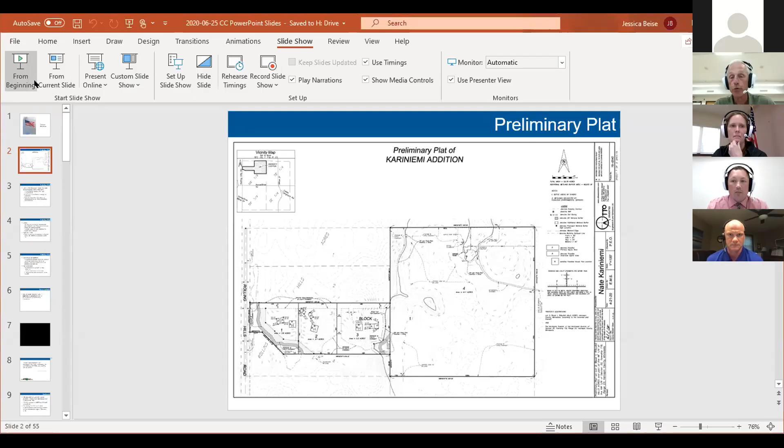Before we get started, I assume Kendra will have a presentation for us, but I want to speak to the building rights program. In general, the challenge is that the goal of the city in the building rights program was to allow people to consolidate building rights and thus preserve open space. I think Lisa brought up the point that they may be doing this with land that wouldn't otherwise be developable, taking advantage of that. Perhaps a valid point, and perhaps it should be looked at.

The issue tonight isn't what our program is. The issue is we have a program, it's in place, and we have to follow the rules and guidelines on that. If the council has an appetite for it, we can at a future date look at our building rights transfer program and see if we're missing some things that might be showing up here.

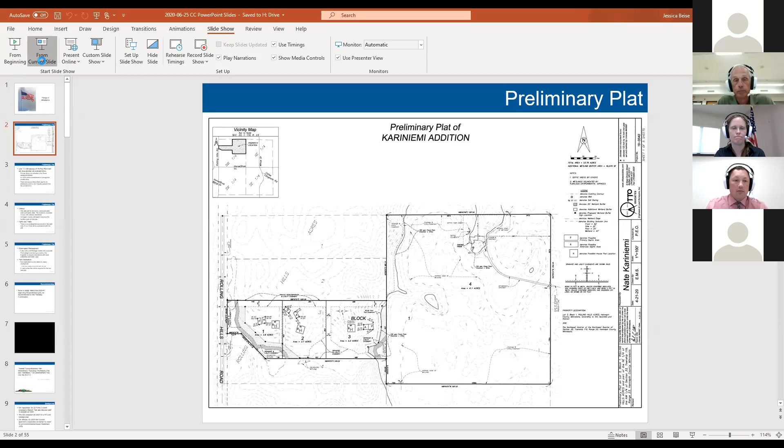That is not the beginning of my show, so I'm missing a number of slides. That is slide 6 of my PowerPoint. I don't know what happened to the other slides, but can I drive? Sure, unless you've got them hidden somewhere. I do not, Kendra, I'm not sure why they're not down there, but I'll make it work. I can pull up the email Kendra sent me earlier today. If there was an operator error, it would have been mine. Yeah, I'm just missing the aerial location map, which is kind of helpful, and the Planning Commission summary. You can just turn the screen over to Kendra, can't you? Yep, I should have just allowed you to be a presenter, Kendra.

All right. Thank you, Mr. Mayor, Council, sorry about the little snafu. You've already heard a little bit from the previous speakers.

This is a request to create 4 lots from 2 existing lots on property guided and zoned rural residential. This is Rolling Hills Road, and this is the lot that was carved off as part of Rolling Hills Acres — there was lot 1, lot 2, lot 3, lot 4 with the existing house. The Kariniemis' existing home is back here on this 40-acre piece.

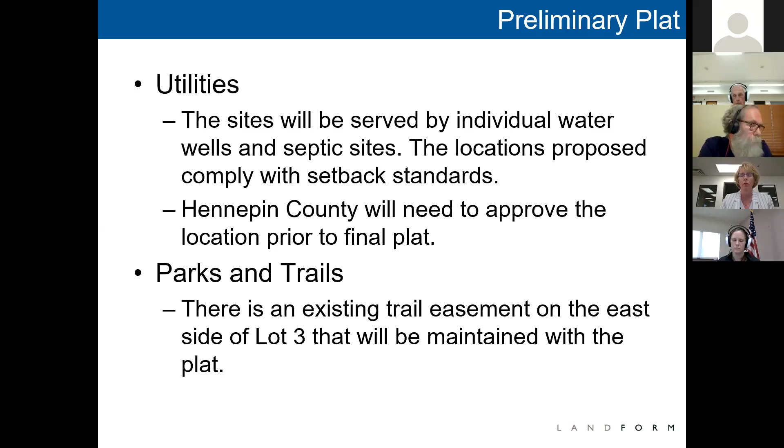There is an existing trail easement on the east side of the existing Lot 3 and the proposed Lot 3 that will be maintained with the plat. So it needs to be maintained even if Lot 4 eventually has future access.

Certainly stormwater management is a big deal with all plats, and it is true that there are still revisions that are required. The engineer's memo is in your packet with a number of conditions. Those final designs need to be approved by the city engineer. Again, before we'll proceed with final plat, they need to be able to show that those drainage issues have been addressed in compliance with city, state, and watershed rules.

There is, as I said, an existing trail, and park dedication will only be taken for the newly created lots. That's 2 lots that will need to pay park dedication. So with that, we recommend that you move to adopt Resolution 20-47, approving the preliminary plat as recommended by the Planning Commission.

Kendra, can I ask a question about the previous screen, please? Or Ron, may I ask Kendra? Yep, okay. Could you define a dry pond and drainage swale, please? Would I defer that to the Public Works Director? Is he here? I think he is. I don't want to misspeak because it is important. Is Kevin here tonight, Brad? Yes, I'm here.

So a dry pond is basically, the term dry means it doesn't always hold water. It's a low, basin area that would fill up with water during a rain event and then dry down. That dry pond is part of the stormwater plan, and whether this is a dry pond or a NURP pond which would actually have water in it, that hasn't been fully approved. That's what they initially submitted. The dry pond would visually look like a grassy bowl that fills with water and then drains down. A swale is really a ditch that has grade on it. It can take any form and side slope, but it's basically an area where you convey stormwater.

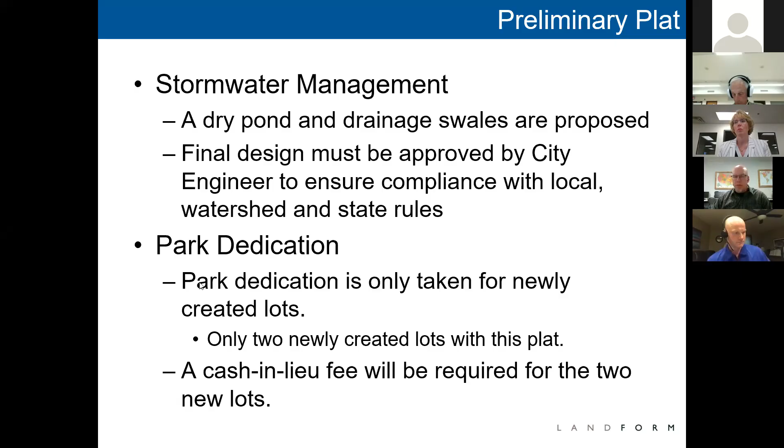From what I looked at and from the discussion at the planning commission, there was some discussion about adding another property on the 40 acres, but that comes with its unique challenges on the northwest section of that lot. My point in asking is, if this lot has 5 property rights and we deny it simply because we don't like the way it looks, we're taking something we've offered to the whole community in our current ordinance standards and saying you can't do it just because we don't like it. That's not a basis for those decisions. This is a reasonable use, and whether it's good, bad, or otherwise in my opinion really isn't all that relevant.

Yeah, Brian, I agree with you. I think that's exactly what we're dealing with tonight: what are our standards right now, and is this meeting those standards? Based on that, we have to treat it accordingly. The issue of whether the 40-acre parcel could accommodate the 4 building rights it has is maybe pertinent to a future discussion on building rights, but it's irrelevant for tonight's discussion.

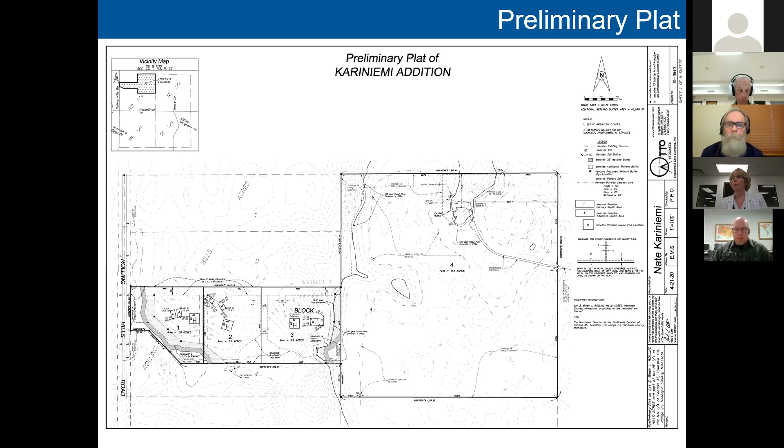I would also add, for those on the call with concerns, I'm only comfortable moving forward with this because of the conditional elements on it. The 17 items brought up and laid forth before this final plat can be presented mean the final plat can't go forward if the drainage issues aren't resolved and if the other listed issues aren't resolved. If that wasn't the case, I wouldn't be comfortable with it. There are significant concerns that have to be addressed, and I think staff and those addressing this, such as the watershed, will be looking at those things.

I don't want to dismiss any of the comments made. I think those are relevant, but we can't turn this down simply because we don't like it, especially since these other issues will be decided based on how they come out. We're not giving final approval here. There are conditions on this preliminary approval and the conditions have to be met. The neighboring properties are right to express their concerns about drainage issues; they should stay on top of it and get as involved as they want. Hopefully staff and our support will look at these issues and make sure they're covered, and I have full confidence that's the case.

Go ahead, Alan. I was just going to echo Brian's comments. I don't like this at all, but we're really bound by the ordinance, the same ordinance that allowed the 40 acres to be split originally into the parcels in question. It's one of those things where sometimes you have to do what you don't want to do because that's the way the ordinance is. We can't foresee every situation, and if we could have foreseen this, we probably would have written something into the ordinance before.

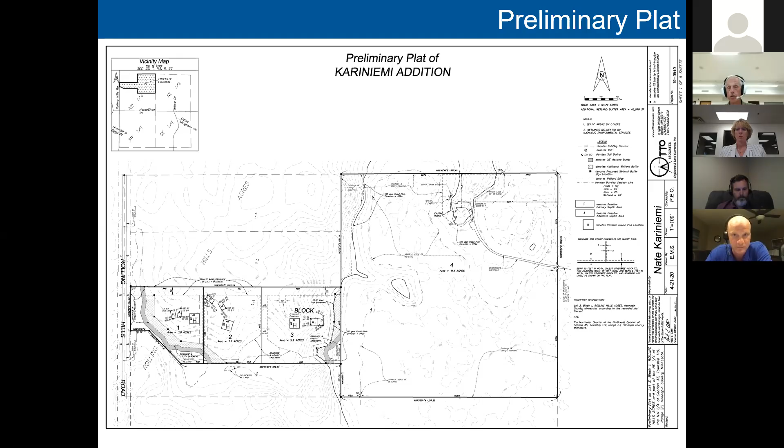Okay, any other questions, comments? Hearing none, I'll entertain a motion to approve resolution 2020-47, which is a preliminary plat with the conditions as stated.

So moved, Dejewski. Do we have a second? I'll second it. Okay, any further discussion?

Yeah, I'd like to make a friendly motion to amend his motion. With regards to the engineering memo, when it talks about drainage, it talks about... maybe I misread that. I think it was talking about a drainage basin that may require additional. I guess never mind, I'll withdraw my friendly motion.

Okay, any further discussion? All in favor of the motion signify by saying aye. Thomas, aye. Anderson, aye. Dejewski, aye. Bodema, aye. And Schultz, aye.

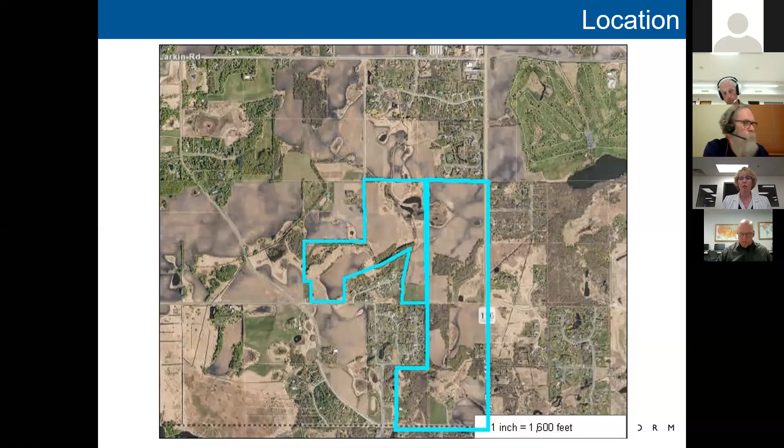Next slide. I put the school districts in, I forgot that I guess. This is in both the Wayzata School District on the east primarily, except for the Tice property, which joins the Dempsey property on the west in the Rockford School District.

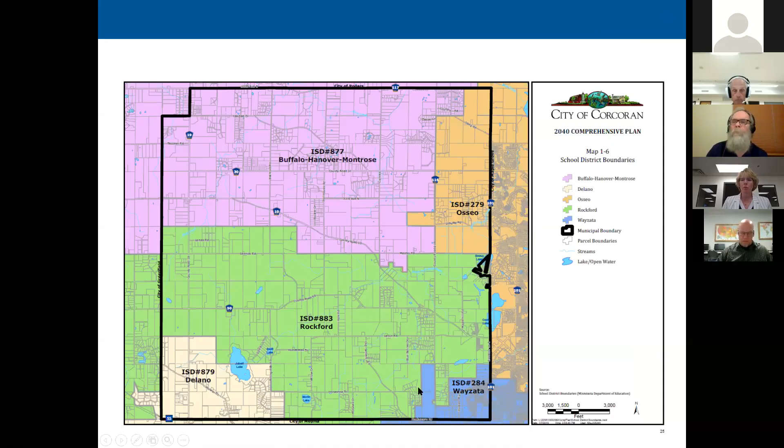Next slide. The property is guided low density residential, which is planned for 3 to 5 units per net acre. And it's zoned urban reserve, which is a holding zone until development is proposed.

I think on that slide, I was just outlining the applications that are involved. A comprehensive plan amendment will bring the Dempsey property into the initial sanitary sewer phase, which will allow us to bring the sewer down from Ravina and loop it up to the north, ultimately to extend with a loop to the downtown project. And then rezoning the property from urban reserve to planned unit development, and then the preliminary plat and PUD development plan.

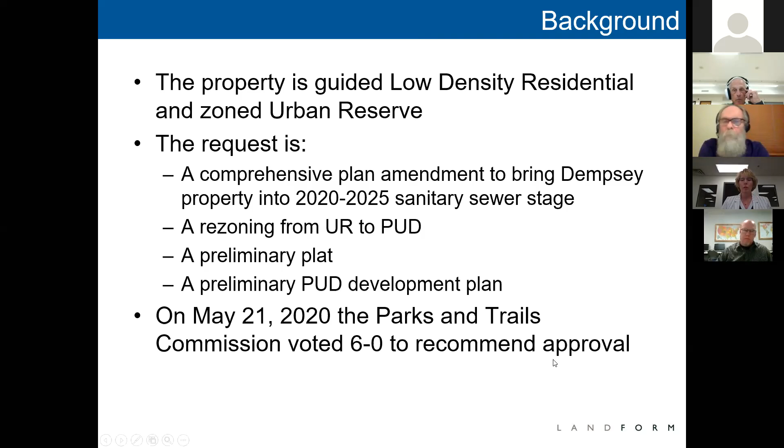On May 21st, the Parks and Trails Commission reviewed the parks component of the project and voted 6-0 to recommend approval of that with the changes as recommended by staff. No, thanks Jess, that was the right slide.

And then Planning Commission reviewed this on June 4th. In addition to the applicant, there were 3 people who spoke at the public hearing on this item. The city also received an email and a letter that were included in the Planning Commission packet and in your packet for this evening.

There was a very robust discussion at the Planning Commission, and at the end, the Planning Commission voted 3-2 to recommend approval of all of the items with 3 changes to the PUD resolution: to require cul-de-sac islands on all of the cul-de-sacs, 2 are currently shown. Require a permanent conservation easement over the tree preservation areas, and then identified a couple of different areas in addition to the lots that staff had previously identified as conditions to add additional landscaping. Those conditions are reflected in the draft PUD resolution in front of you tonight.

Next slide. It was, as Councilmember Schultz knows too well, and others may know now after watching it, it was a late night. Late into the evening, Lennar did speak about some issues that they requested modifications to. The Planning Commission did not make any changes.

I wanted to highlight some of these issues because I know Lennar would like to speak to them tonight, and at least give you some time to identify them.

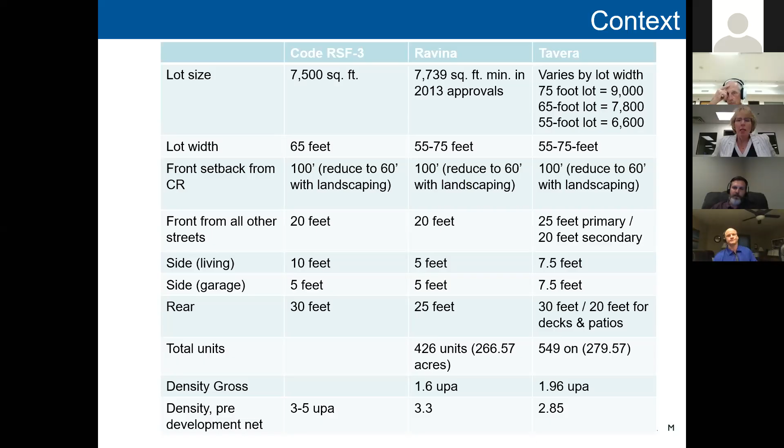Next slide. Kendra, can I ask you a question on the comparisons? Did you have comparisons of the garage size versus the front of the house? I looked back at the original Ravina, and to be honest, on the original Ravina they said here's our product types, none of them comply with the 55%, so we'd like the flexibility, and here's what we'll give you in return. So we really didn't measure at that time back in 2013, I did not have a comparison.

Did we do any changes throughout the PUD amendments through Ravina related to the garage space exceeding 55%? Yeah.

I would imagine we did when we went to some of those smaller homes. Yeah, the one thing we did do that I can recall, and I believe this is the only change related to that, when Lennar came in with the Ravina development, their proposal in exchange for more garage space was that we will not have any garage-forward homes in this project, plus they'll jazz up the front of the garage. And the council approved that.

And then, I don't remember how far into it we were, maybe '17, they came with a new product they call their Discovery Unit, which is a smaller home with a 2-car garage generally, and it is garage-forward. That actually may comply with the 55%, I can't really remember. But the council did approve an amendment to allow garage-forward on the Discovery units in that project.

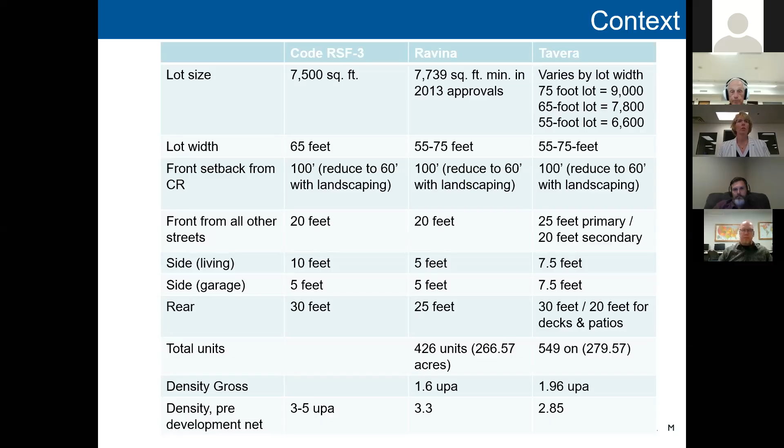It's a change to the sewer staging plan to allow the entire property to be developed together, which benefits regionally by allowing that sewer extension to be part of the project. So, next slide.

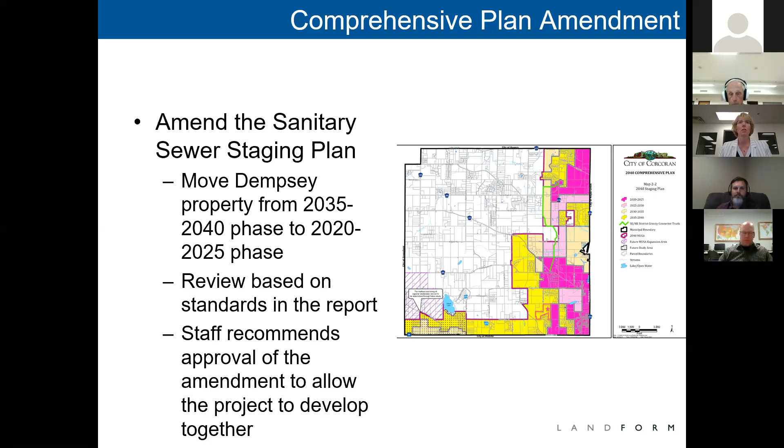The rezoning from urban reserve to planned unit development. As you know, urban reserve is a holding zone until sewer and water is developed, and then at that time we would rezone it to a zoning district consistent with that underlying land use. There are a couple different districts that would typically fit.

RSF3 is one of them, and that's why we used that for the baseline measure for the PUD standards. Now, a PUD is really contract zoning.

And this is more for the audience than for the council—you know this. It's contract zoning, a negotiated zoning district where the developer asks for some flexibility, and in return the city gets other things we wouldn't be able to get with a straight plat.

With the previous application, if it meets the code on a plat, you have to approve it. Well, this gives us the ability to negotiate better design or other amenities. So, next slide.

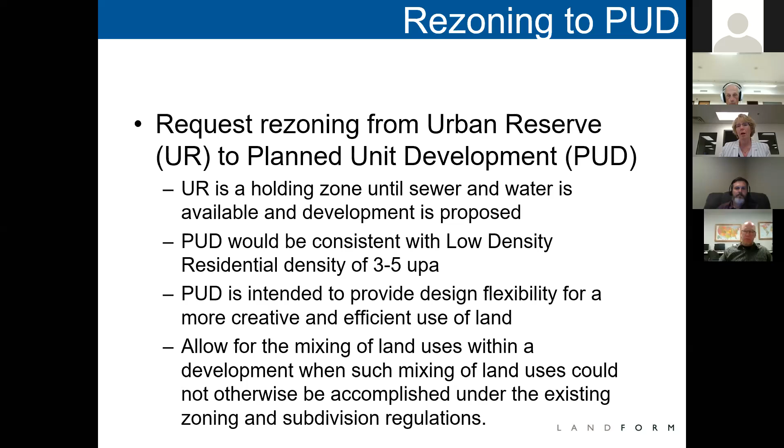Again, there are PUD standards in the ordinance, and I just want to highlight the rezoning to PUD doesn't become effective until the PUD final plan is approved. So at a later date, you would approve the rezoning tonight, but if you read the resolution, it's effective upon...

Adoption of the PUD final plan. Just a procedural item, but I wanted to highlight it. Next slide.

This is the PUD plan. We kind of looked at it earlier, but again, in context, you've got townhomes down in the southeast corner of the site, primarily single family as you wind through the site. At the end of Trail Lane, you've got a small twin home development, and then a twin home development behind that, north of Trail Lane, and then up by where Blue Bonnet connects.

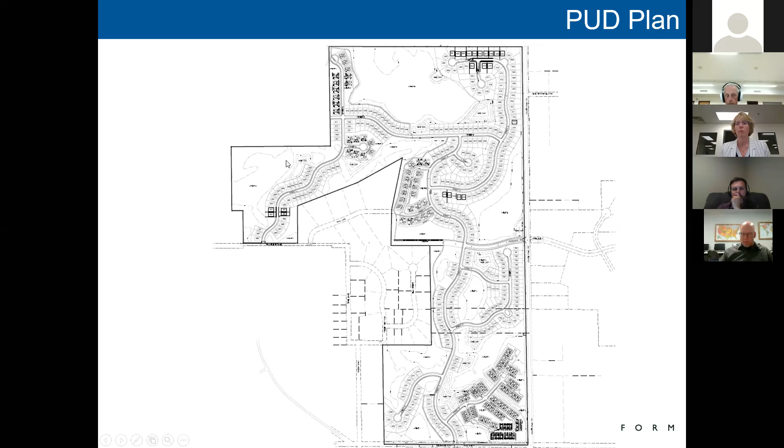So the PUD request in general, I've summarized here. I'm not going to go through it because I know you guys have done your homework, but this is sort of the proposed flexibility and the proposed benefits. Next slide.

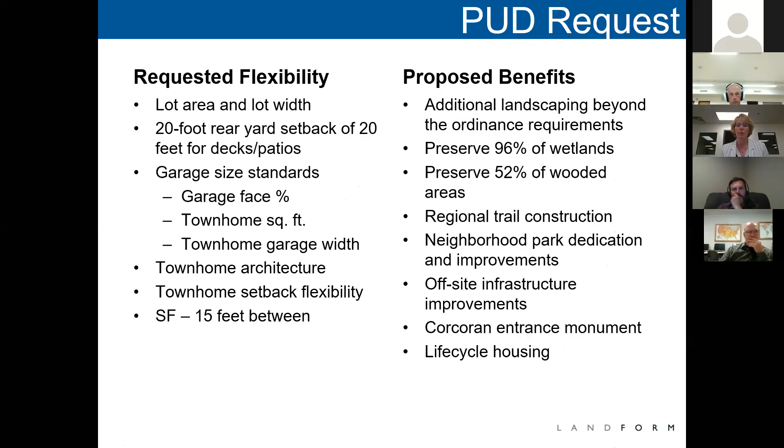So the plan includes 265 single-family homes on a mix of 55, 65, and 75-foot lots, and then 70 villas, which are single-family homes with association maintenance on a mix of 55 and 65-foot lots. There are 80 twin home units, meaning 40 buildings, 80 units, and 134 townhomes. Next slide.

This table was in your staff report, so I'm not going to read through it, but it highlights some of the areas where flexibility is requested for certain units. I did not highlight, just for the record, the 7.5-foot side yard setback, because really what we have in the code is a 10-foot side yard setback on the living side, 5 foot on the garage side, a total of 15 feet between buildings.

And I think it gets us there. So we could talk about that, but to my mind, it was a 15-foot separation. So I didn't highlight that. Next slide.

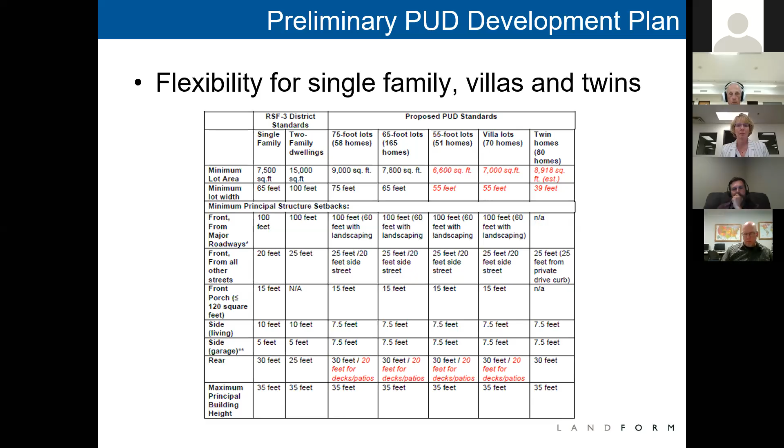Flexibility for townhomes. Single-family homes have a 20-foot front yard setback. Townhomes have a 25-foot front yard setback. And we recommend that that be maintained. And front yard under our ordinance is along any street, it's a front yard.

In fact, we recommend that they maintain that 25-foot setback along the perimeter of the site as well, which may occasionally be a side yard. We think that it's important to maintain that along the perimeter of the Tavera site.

At the Planning Commission, there was some confusion about base lots and unit lots. It is a technical piece that came up, and I put it in here, but a base lot, you could have a townhome base lot, which wraps around an 8-unit townhome building, and each of those units in the townhome has a unit lot.

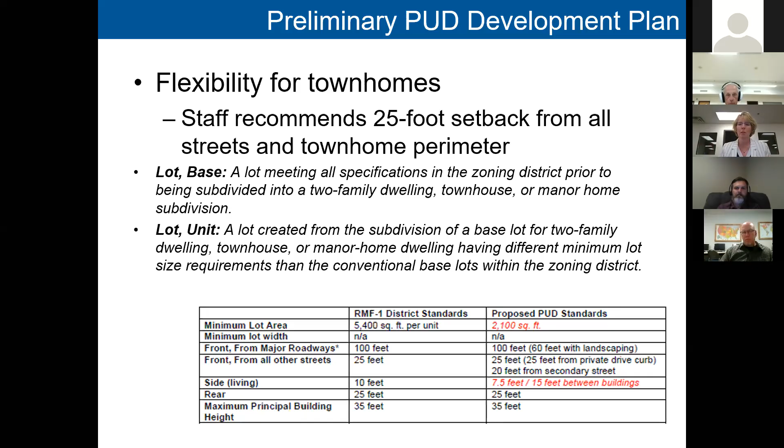And really, because the unit lot just mostly goes around the edge of the actual structure with a common wall, when we look at lot sizes, we're really talking about base lots. And there was some confusion about that we probably needed to clarify. So next slide.

Design standards, flexibility for the single family, villa and twin homes. Again, they are requesting flexibility to allow more than 55% of the front face of the building to be garage. And depending on the unit type and whether it's a 2, 3, or 4 stall garage, that could be as large as 75% of the building face. And this was a big item at the July 2019 work session.

And consensus at the time, not complete agreement, but consensus was that it was really important to maintain the building separation, and that garage face was important, but there would be consideration given for flexibility with the PUD if there was higher quality architecture without garage forward design.

Because of that, in this case, the applicant is not proposing to prohibit garage forward design, but the staff report suggests, and the Planning Commission recommended, that in order to allow that additional face of garage, it would have to be not garage forward.

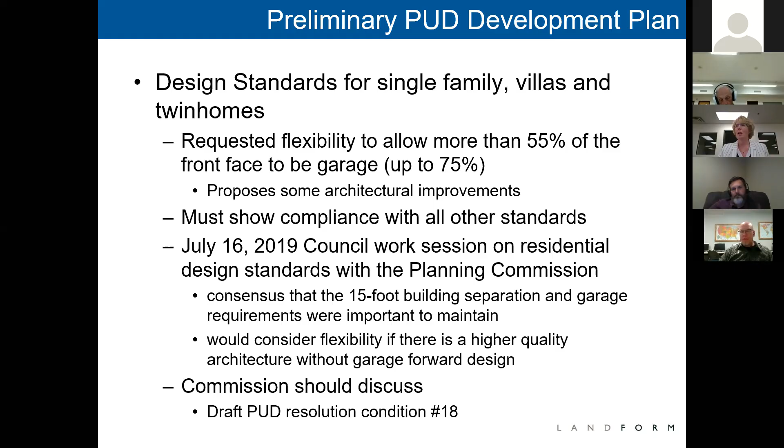So these are some examples of the single family architecture. Again, it looks very similar, I think, to a lot of the product in Ravinia. But as we said back in 2013 with Ravinia, it's important to note that the market changes all the time. These are some examples of products they're building now, but they will have slightly different products as this moves through its 8-year phasing plan.

So we're not approving specific single family home products, but this is an example of the kinds of products that they would do, and they would still be subject to all of the standards in section 1040 of the ordinance, which relate to materials used and percentages and architectural elements. And generally these do appear to comply with that. We don't have the percentages, but they generally do, with the exception of the garage percentage in some of these cases.

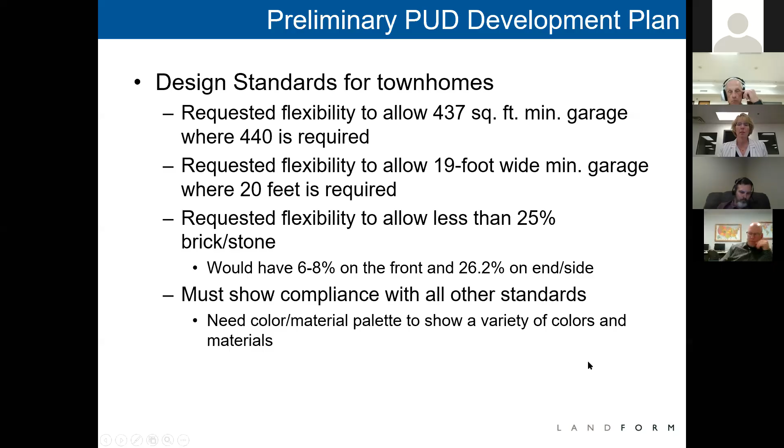These are examples of townhomes, and I believe in the applicant's narrative he mentioned these are similar to the product in Maple Grove on our border across from Lions Park, if any of you had a chance to visit them. So pretty typical townhome, a mix of some wainscoting on the front of stone, and then a mix of lap, shake, and board and batten trims above.

Next slide. Utilities will be extended from Ravinia to the site at the developer's cost, and the city has been working on that extension of Gleason Parkway and the associated utilities extension. The work is expected to begin this fall and could be completed in the spring of 2021.

Stormwater is a big deal on every site. On a site this size with this amount of wetlands, it's complicated. So that is still being reviewed. We've had a number of meetings with the developer's engineer. We are working to resolve those issues, and again, would work through that prior to moving the PUD final plan and final plat forward for compliance. Next slide.

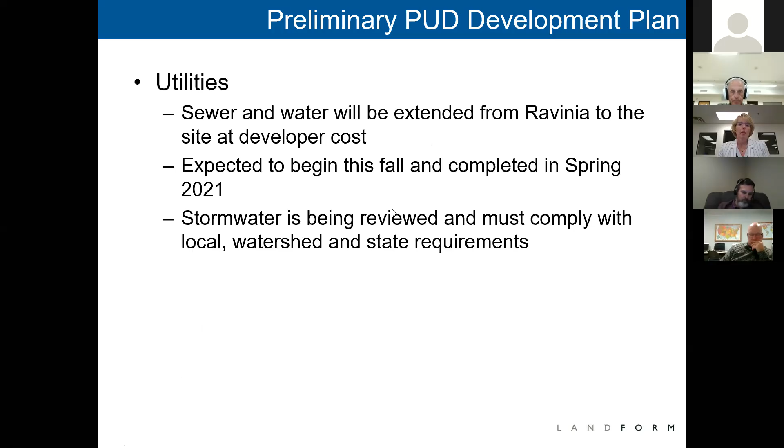There are a number of improvements to County Road 116 required for the new entry, and paving of gravel streets that would happen outside of the scope of the project: Old Settlers Road from Butterworth Lane to Horseshoe Trail, from Old Settlers to the east line of the Dempsey property. There would also be a number of improvements to Hackamore, including turn lanes. As the council knows, Hackamore is a larger project extending from west of this project all the way over to County Road 101.

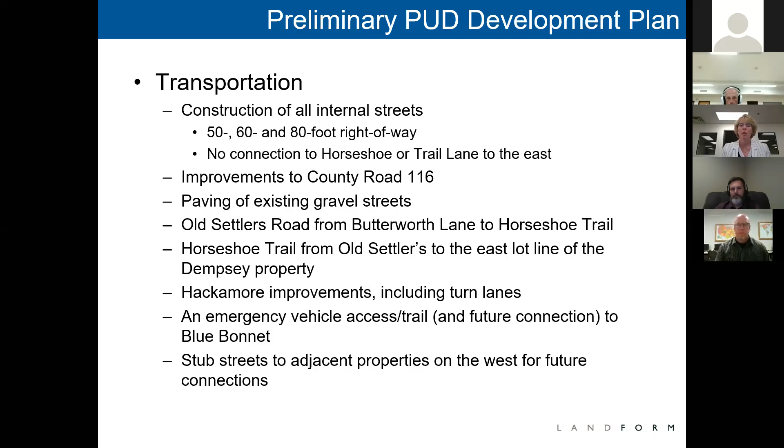The city and the city of Medina are working together, but this developer would be responsible for their share of those improvements as outlined in the feasibility study. There is also an emergency vehicle trail access to Blue Bonnet on the north, with a plan for a future street connection when the property north of this site develops, which would become a through street in the future. As always is our policy, we are stubbing streets and utilities to adjacent properties on the west should they wish to develop in the future.

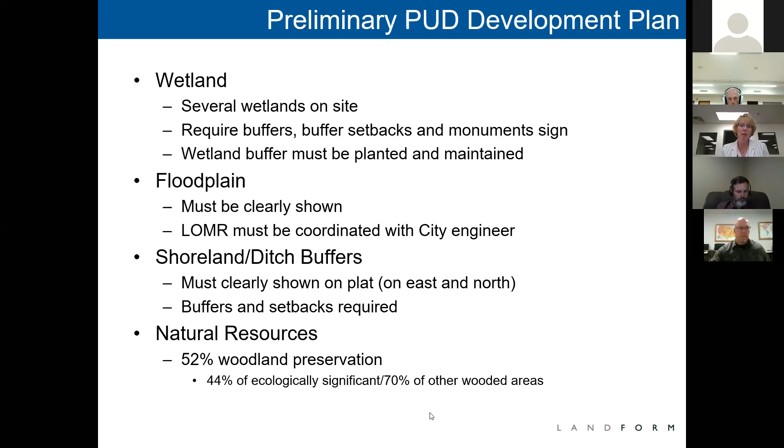Next slide. This is their tree preservation map. The red and orange areas are the removal, and the yellow and green areas are the preservation, depending on whether it's woodland or ecologically significant areas.

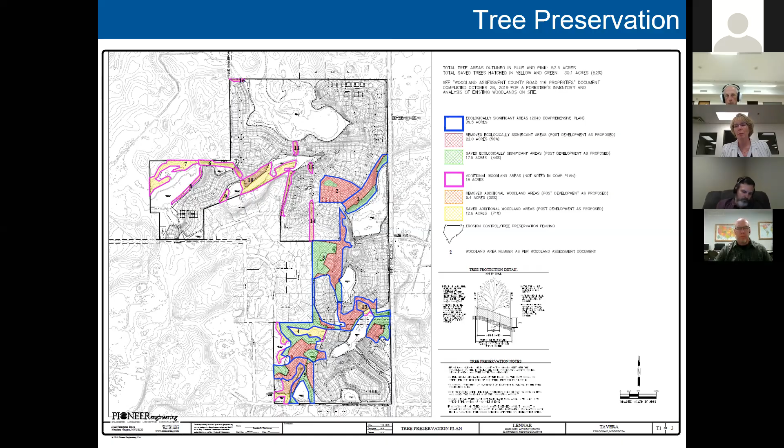One of the conditions added by the Planning Commission is that those preserved areas need to be under some sort of a conservation easement. We didn't talk a lot about the details, so whether it's truly called a conservation easement or a tree protection easement, some tool is needed to ensure those trees are protected and not removed, but with an opportunity to go in and clean up disease or dead wood from a public health standpoint.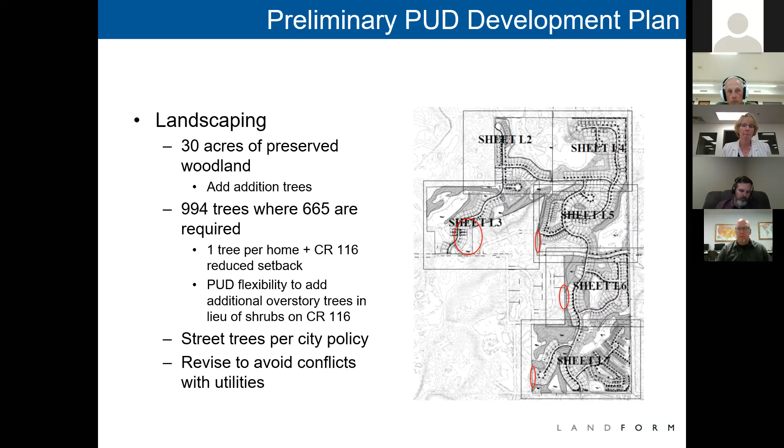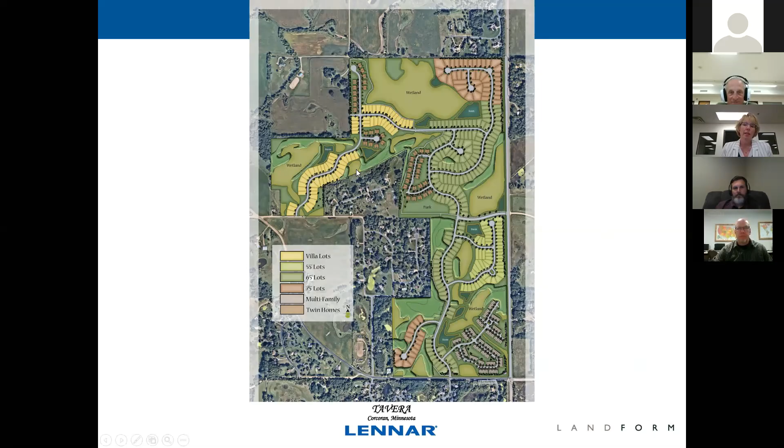Next slide. This is the site plan where you can see, in some of those areas I had circled, little dots where they're adding trees. It is, I acknowledge, hard to see on the screen. Thanks, Jess, that's helpful, yes, in those areas.

Next slide. One of the benefits of the PUD that they're suggesting is providing a gateway sign at the corner of Hackamore and 116. At the Planning Commission, they provided two examples of entrance signs: the left one as an entrance into the development off of 116, and the right one as an entrance sign off of Hackamore. These are early design concepts, certainly not ready for approval, but generally they complied with our ordinance requirements.

They said, if you would like, as a PUD benefit, we would build what I call a welcome-to-Corcoran sign. We've talked about these gateway signs in the past, but never really in detail about what they might look like. Here's an example showing the corner with additional landscaping and a sign with stone monuments and a split rail fence look connecting them at the corner.

I made it too small to read, but I think this sign says welcome to Corcoran, though it may say Tavera Corcoran, I'm not sure. I think they'd like some feedback from the council about whether that's desirable, and then you could provide direction. We could work through the details with them before the next phase of the project. Next slide.

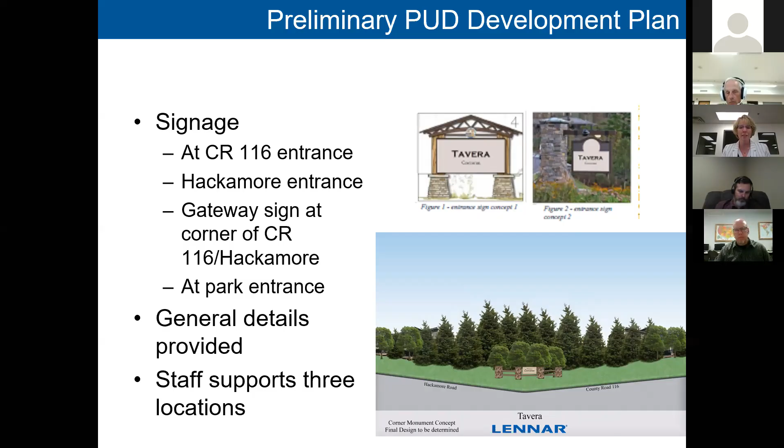Park dedication is a big part of this PUD. As the council knows, earlier this year Three Rivers Park District came to you and talked about refining their Diamond Lake Trail plan. One of the things they talked about is maybe moving that regional trail through this project since it was coming forward, aligning with the off-road trail on the western edge of our comprehensive plan. Lennar has agreed to work with staff and moved it into the development, allowing that first piece of the trail in Corcoran to be built with this project. As a regional trail instead of a city trail, it's still in a 20-foot easement, but the trail itself increases from 8-foot to 10-foot wide. That's a condition of approval in the resolution.

We've also got on-road trails planned on 116, Horseshoe, and Hackamore in the right-of-way. In the staff report, we recommended a number of changes to the Parks and Trails plans that the Parks and Trails Commission recommended, and those are included in the draft resolution.

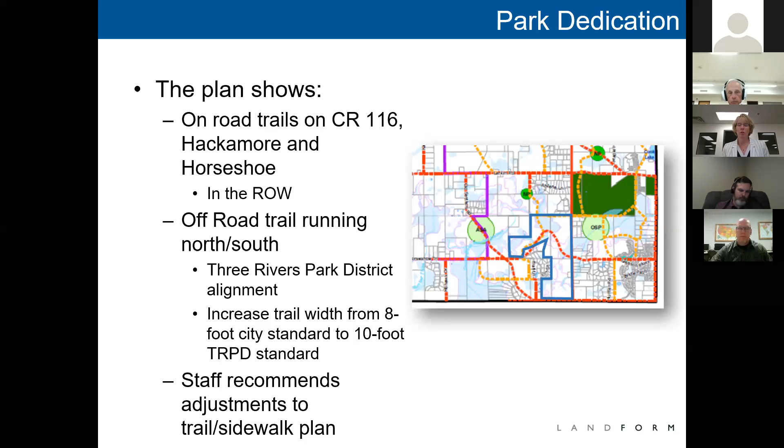The plan does show dedication of a 4-acre public park where the red star is near the entrance. While a neighborhood park wasn't originally on our comprehensive plan, a development of this size certainly warrants one in our opinion, and the Parks Commission recommended acceptance of that park. As part of that dedication, and because it's a PUD, we will be asking them to make improvements including a small parking lot, grading, extending the driveway into the park from the public street, and constructing the trail through the park. Those are things we couldn't typically require with a plat, but are benefits of the PUD.

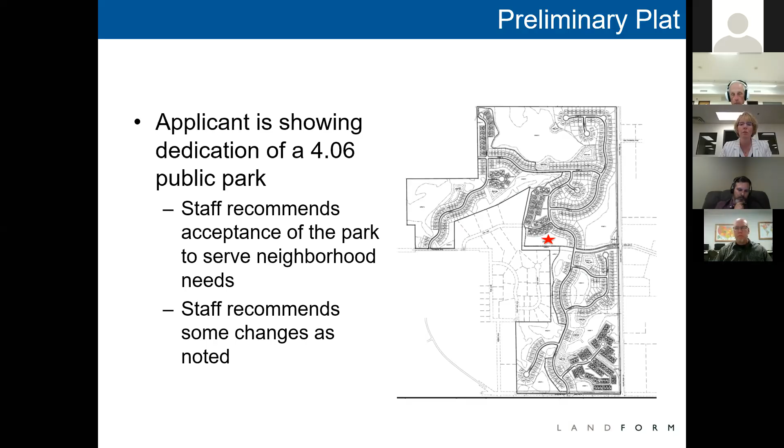Park dedication for single family is 15% of the land area, so this will be a mix of land and cash. We would accept roughly 4 acres of park and roughly 2 acres of trail. Final details would come later. If those are accurate, that would leave almost $1.9 million in park dedication to be paid with this project, coming in with different phases, so it doesn't all come in immediately.

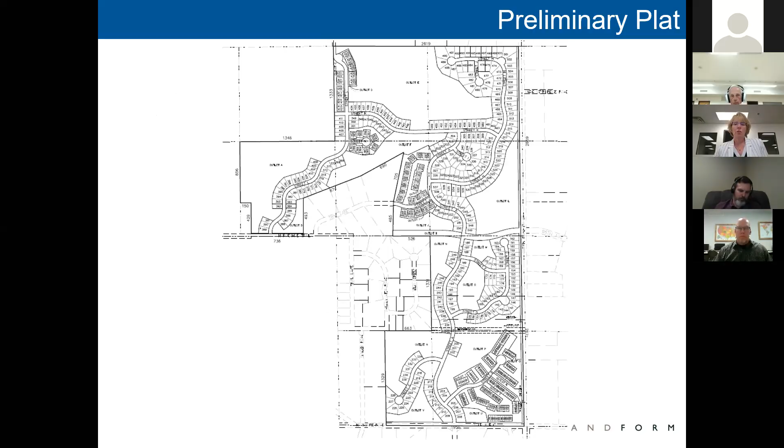This is just a reminder of what the plan looks like. This is the phasing plan. Initially, where you see 116 and Gleason, what was Gleason Parkway, once you cross 116, is called Horseshoe Trail, doesn't connect through to Horseshoe Trail, but comes in and then goes north or south.

South of the new Horseshoe is phase 1, which is single family homes and some of the townhomes. Phase 2 would be the rest of the area south of that in the townhome area, and some of the single family homes right there. Then the plan would be to come north of Horseshoe for the next 2 phases. It's an 8-year build out plan, but as we learned in Ravinia, it's all kind of market dependent and things can shift, but this is their vision for today.

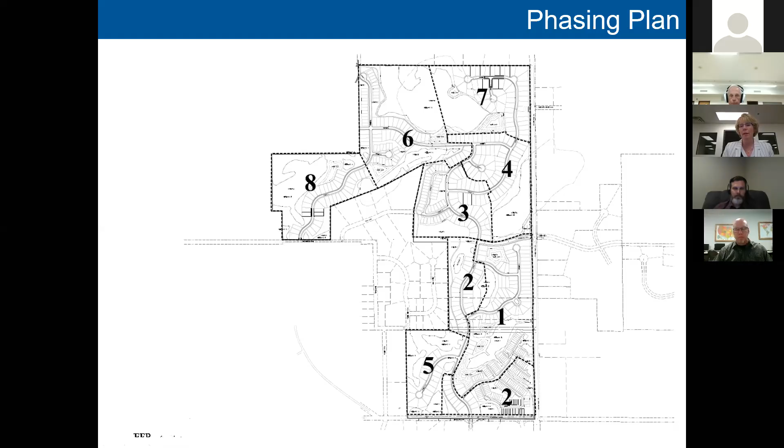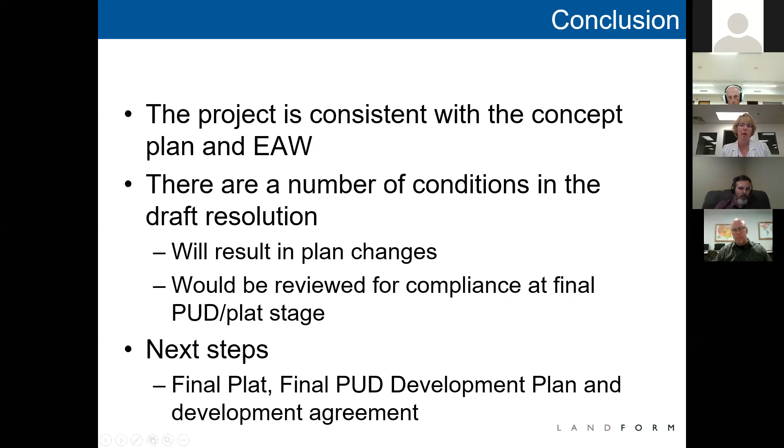In summary, the project is consistent with the concept plan and the EAW and is subject to the mitigation strategies identified in the EAW. There are a number of conditions in the draft resolution that will result in plan changes. The scope of those changes I don't know, but some are fairly significant related to right-of-way width and setback requirements. There would likely be changes when this comes back for the PUD final plan and plat, and that is the next stage. If this is approved this evening, the next step would be for them to come back with their final plat and final PUD development plan. At that stage, we would also have the development agreement, which outlines all of the financial responsibilities of the developer related to the project.

And that is my abbreviated presentation. Based on that, we are recommending adoption of the following resolutions, which reflect all of the changes from the Planning Commission and the Parks and Trails Commission. Thank you, Mr. Mayor, happy to answer any more questions.

Okay, I think at this time Paul Tabone wanted to give a short presentation. Maybe we could take that before we get into general discussion.